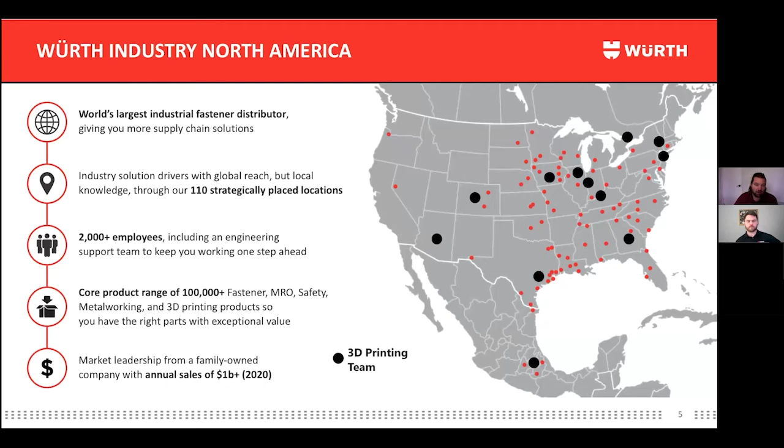We have 110 locations in the United States, and our mission's pretty simple. We're here to help support, implement, and really enable our customers to utilize digital inventory within their supply chain. This could be from the tools, fixtures, different MRO parts that AJ mentioned, to full-scale production. It really doesn't matter what they're trying to do, it matters if it's a good solution for them.

We offer a lot in terms of what we could do for our customers, from machine sales to rentals to just printing printed parts, sample parts of models. That's something we'll touch on later in this presentation that could be useful for you guys, as well as servicing machines, basic education and workshops, financial services, and then all sorts of engineering and technical services as well.

AJ, maybe you want to talk about our customer base and what we've seen from them. I think it's just a theme we see across automotive and those other sectors we hit on, where everybody's looking at this technology, trying to figure out how to maximize it for them.

That's where I think we'll talk about a couple different things in construction, that it's not always 3D printing buildings, but it's prototyping new linkages, new assemblies for steel work, trying to restore classic architecture, which we'll go into in more detail.

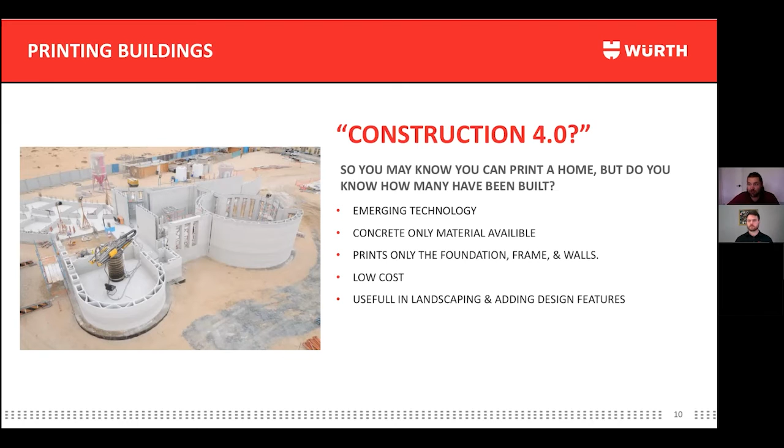Relative to a lot of other forms of traditional construction, this is an inexpensive process, which we'll get into where that may fit later on. So let's take a minute and talk a little bit about the advantages.

These are being marketed and they are very eco-friendly. A big part of this is looking for a means of construction that's sustainable, with a low carbon footprint. Other benefits: it's very scalable, it's modular, you're able to repeat the same process over and over as long as the foundation is the same. You don't have to reprogram it, you can simply move the device over and hit go.

A lot, and maybe AJ, you want to touch on the design flexibility, because that's where we're really seeing the impact of these being used as opposed to other areas. Yeah, so the example coming from our core, which is industrial supplies and industrial 3D printing parts, is that 3D printing a wrench usually isn't a great return on investment because wrenches are quite easy to get mass manufactured at a great cost.

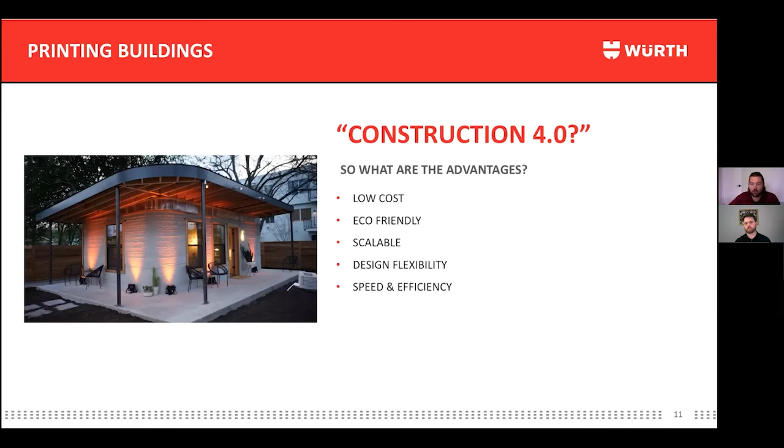So let's talk about the downsides. There is an initial investment for the machines. They are not crazy expensive, but they're not cheap either. Still, as these become more regular, the machine costs are expected to go down.

The largest factor, and AJ touched on this earlier, is the lack of certifications around the buildings. For most commercial structures, or all, it's really not super there yet. And the other part of it is, of course, you're just dealing with partially built buildings. AJ, is there anything else you think for the downsides of construction 3D printing?

Oh, don't try - a 3D printed tool shed that's just a cube won't do you much good. But there are a couple things. One is you can tell with the layer lines - people that do work in concrete quite a bit can see where they actually stop the process for a chunk of time as the gray color gradient on the concrete changes. So there are people like COBOD who've developed processes where they add a planing feature to the nozzle to help reduce that. The downside is it's an overly engineered solution for a simple problem.

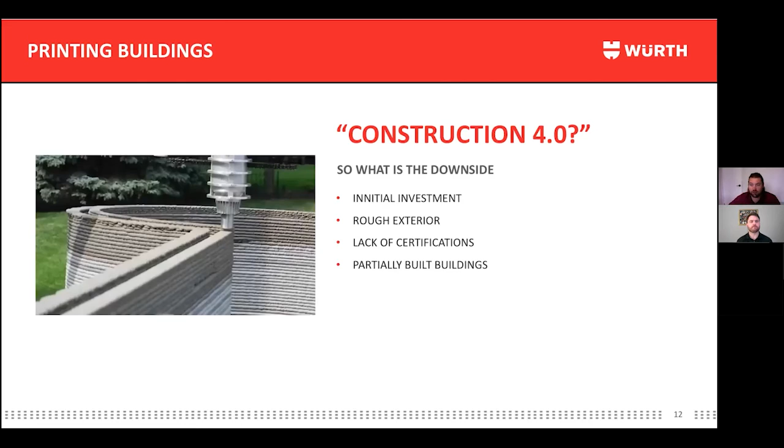So I think you did a great job of outlining that. Absolutely. So where does this fit, at least right now, present day? Temporary structures, like you were outlining, are a great fit. In harsh environments, this could be a really good fit.

Military applications - that's a huge adopter of this. The military doesn't have to deal with as many regulations as civilians, and they have a need for small structures. This could be for housing, barracks, but it's also used for training. If you wanted to build unique facilities to model a particular village that special forces may be going into, you can print the structure to do training within it relatively accurately. Utilizing that, and later we'll talk about VR and similar technologies, you can get your soldiers prepared before boots on the ground, giving them a small advantage.

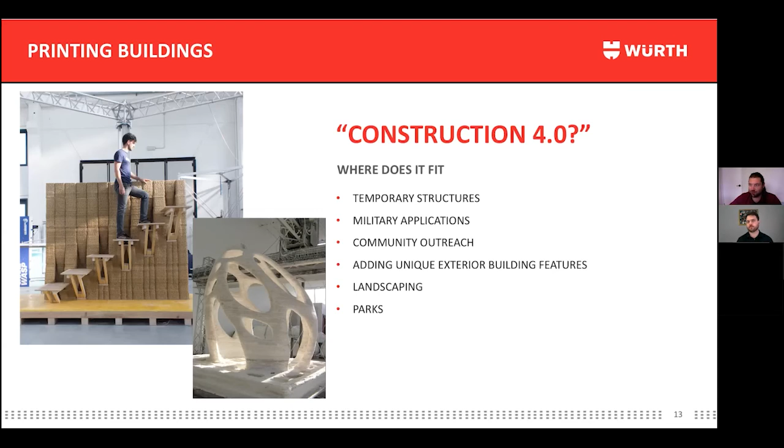So, related technology to 3D printing that is probably more applicable than 3D printing itself is 3D scanning. This is by far the most adopted and most used. Scanning technology has come a long way. What we're seeing is people using it not only to scan and reverse engineer parts, but to scan entire buildings, interiors, exteriors, plumbing, HVAC systems, everything. And using them to create CAD files, 2D drawings, and utilizing them to create a VR environment.

To either compare what you wanted, your current state, to what your design is after you're done with your construction, to safety. We're seeing a lot of people utilizing this type of technology where they're mapping it out, creating the VR environment, and going through an operation with a person.

And I'll have AJ give a good representation of what one of our customers is doing. But let's say if you had to get very high in the air and do something critical, you want to rehearse that. Much like I said with the special forces earlier, practice, practice, practice. It gives you that advantage and it reduces your risk.

So we're seeing people map this out. And for those cases, say a crane operator where you have something really specific and critical, they can relive that and do it time and time again before actually going into it. And AJ, I know you had a really good example of this. Do you mind telling the crowd?

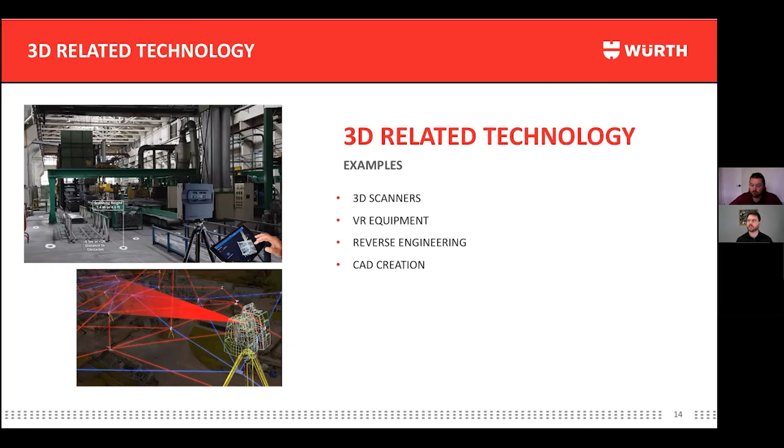But if you go to the next one, I think that's where, as you're actually building, not so much the training of it, but Ben, talk a little bit about what you have here, where people are actually using those 3D renderings and things like that to ensure good project planning, good vision, and the ability to adjust on the fly. Can you describe what's going on?

So what do you want it to look like? You can make sure that everything is correct, and actually measure via the software to see that this beam is where it should be, and that it's going to be able to fit. So you can troubleshoot issues before they come up.

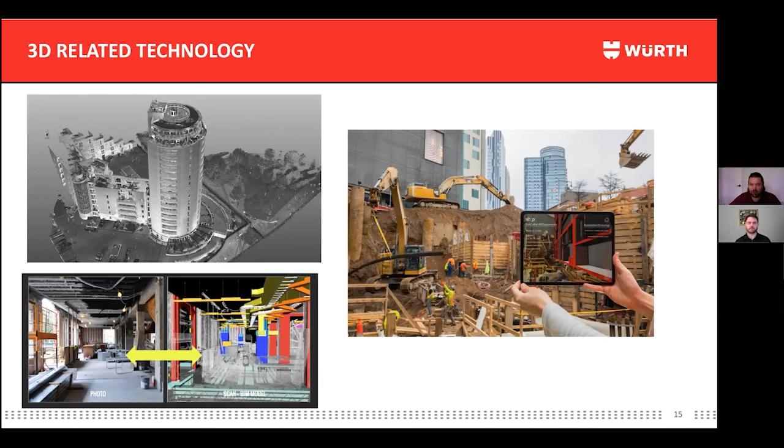Another part is if you're working for someone who's interested to see progress, you're able to show them easily what this will look like. Instead of having to explain to your customers what's going on, you can educate them by visually showing where the project's at and what the next phases could be. This technology is readily available and utilized - you guys are probably using it now - but it's one of the aspects of 3D that's more prevalent in construction, and it's just one of the coolest things.

So what technology is doing for those folks is now you can walk into that site, take a high fidelity scan of the location, all of the features down to a very fine detail. If you do have to recreate it, you can now take portions of it and send it to a machine shop or a craftsman to help recreate. There are portions you might replace with additive, but the biggest thing is using that new technology to recreate as close as you can to that original, beautiful craftsmanship that got put into it.

Where you may use additive is not the final product - it might be the model of the product. You may utilize this to generate the model to then show someone, hey, this is the specific section we need work on, and here's everything along with it. So again, it's accelerating understanding while you're trying to explain this to people. Visual representations, tangible things, usually help.

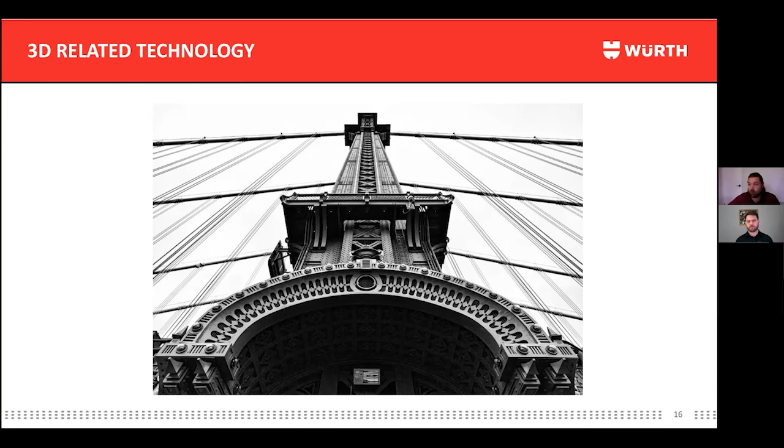And we'll go into that part later, but that was the early beginnings of our additive group. We were simply making prototype fasteners, not to be used, but just to get into our customers' hands so they knew what we were talking about. And that's what we're talking about right now - put it in their hand.

Creating a model of what you want to do is very impactful. It's very cheap, pennies - it is extremely inexpensive. It is a great way to start with additive manufacturing. You're able to learn it at your own pace, use it to help accelerate your sales, help with customer understanding, and you're taking something from a drawing and making it tangible.

And the vision for our group really did start with AJ in Des Moines doing just this. Since then we've grown substantially to helping enable customers. When we're seeing people reach out to us, it's not about concrete 3D printing, not about reverse scanning - they want to just make some models for their customers so they can put this part that they've tried so hard to explain to John, and John just isn't getting it. They say, could you help me make this? It's really simple, we look at it, sure. You hand it to John, and John's like, I get it now. That is an unsung use of 3D printing that is wildly cheap and very impactful.

Imagine if you're trying to challenge an architectural firm - you could have them quickly iterate on those models of the thing you're working on, make changes, and slide that model across the table. As I understand it, when it was all handcrafted and put together, those types of live models were pretty cost prohibitive. But now, if you want to print that entire small community, including the trees and the park bench and all that detail, it's no longer somebody putting miniatures on a page. They change the 3D CAD file, hit print, and now you've got a great landscape of what you're trying to build.

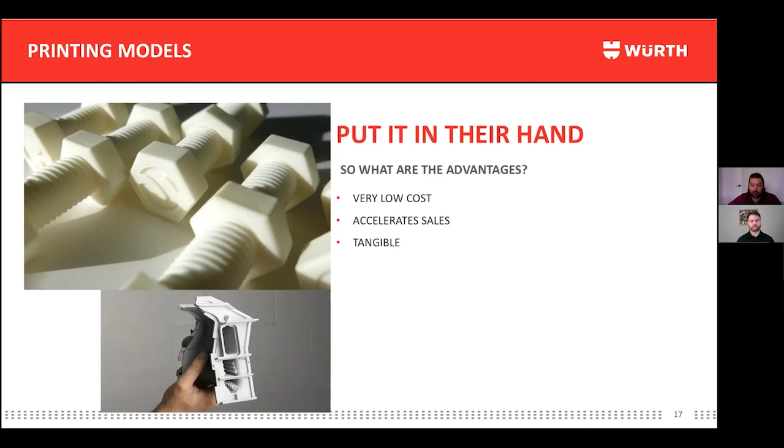And one of the last applications is 3D printing tools and any type of job aids. Where we see this being used in industry, construction, and pretty much everywhere is custom assembly tools—things you maybe need for one job. Before, you weren't going to go to a machinist, maybe you didn't have a CAD file. Now all of that is unlocked so you can make stuff more efficient and safer.

We've seen a lot of applications within OSHA compliance. AJ used to give a great example for oil platforms, where they'd be carrying up a large metal wrench to help tighten some fasteners. Now you can make that same wrench to do the same job out of a composite—performs the same, but if it drops and falls on someone's head, it weighs a lot less. It's also a lot less expensive. And because you have another printer on site, you're able to reprint the replacement and get back up and running.

Things like that are really where we're seeing adoption in all sectors—welding aids, and anything related to welding with printing high purity copper is going to be a very big application for us.

And then machine repair, coming back—it depends on what level you're doing. A lot of OEMs are supporting their machines, obviously, but maybe you have that French machine AJ referenced, and you just need a lever with a unique geometry that's going to cost you $3,000 and a month to get. Well, you could just probably print it, and it's going to cost you $3 and might take 4 hours. That's where we're seeing a big fit, and where we think it would be good for the construction industry.

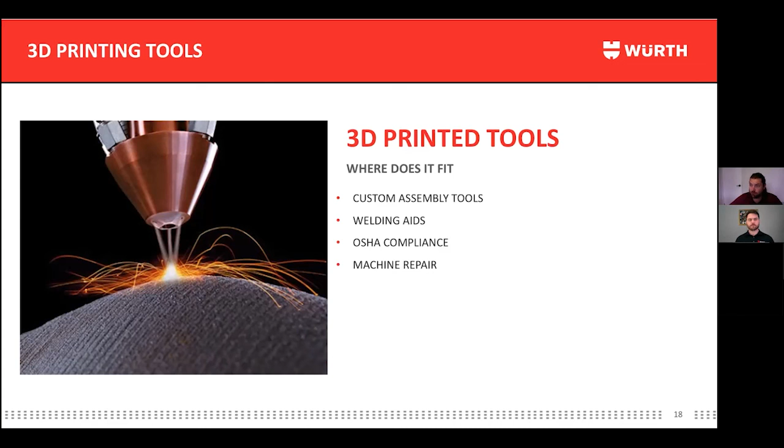Agreed. And with that, we'll happily put some of these on site for you guys. AJ, if you want to talk a little bit more about this before we say goodbye.

Yeah, I think it's more—as you've probably seen our Würth containers—is we want to serve our customers the way they want to be served, and sometimes that means being a little creative. So that Würth container is kind of a standard program. We'll go onto your job site and have your consumables and different materials inside of it, and once the job's complete, we can pull it out. We have all sorts of little tricks we can do to make it easier and fit your buying needs.

But as we approach things like oil and gas and renewable energy, and people doing construction or a lot of work in very far off or remote locations, being able to have all that manufacturing flexibility on the job site with you is a really powerful idea. So for us, we're trying to bring the same kind of eye and maturity that we have in our core business of industrial goods—getting to the point where we have custom made shipping containers to help serve our customers—and apply that same thinking with additive. We're trying to not just make a 1-year jump in how we think about inventory management, but how do we make a 5 or 10-year jump. This is one of those ways we humbly think is thinking ahead.